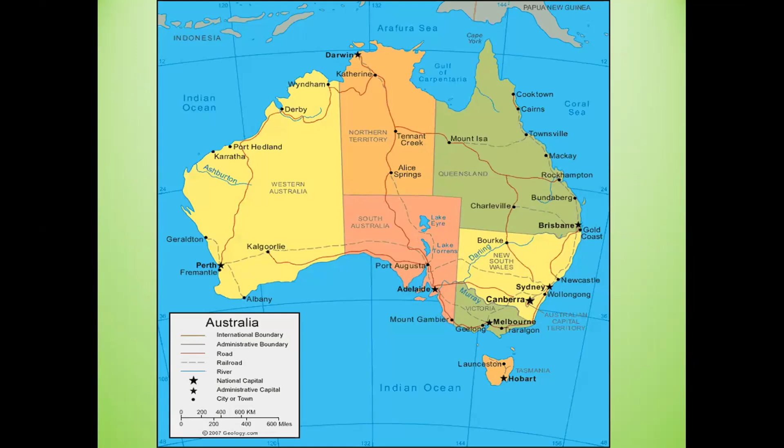While we may not be the largest state in Australia, we are quite heavily populated, and Transport for New South Wales is responsible for maintaining and operating approximately 18,000 kilometres of the road network. And of course, we have bats that occur in those networks.

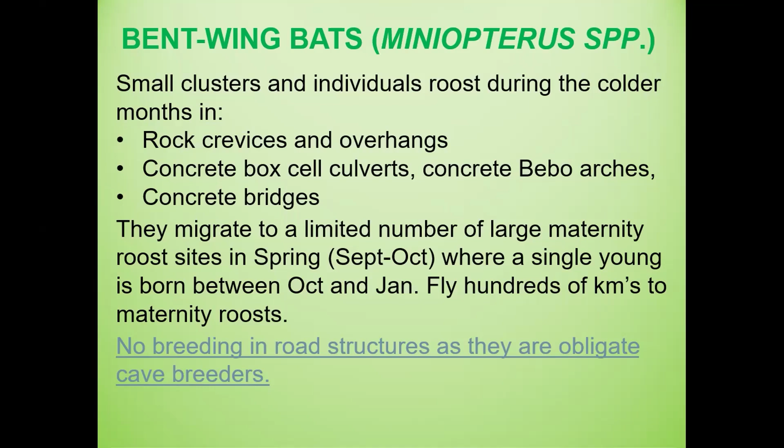So we have bent-wing bats. These are smaller guys, they're obligate cave breeders, so they don't actually breed in any of our structures, but they'll roost colonially in the structures and then fly hundreds of kilometres away to birth simultaneously in limestone caves. So while they do occur, they just don't breed, they just roost over winter.

So we only have one species of Myotis. I know North America has about 18, I think. And these guys will be the focus of today's presentation because replacing long-term breeding habitat is more difficult than replacing temporary roosting habitat.

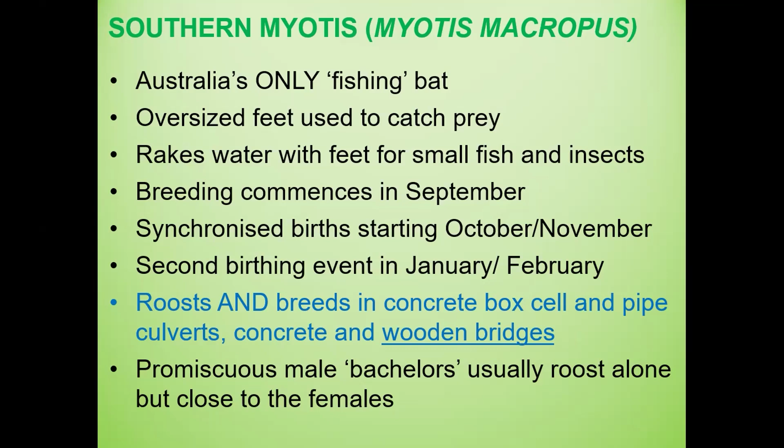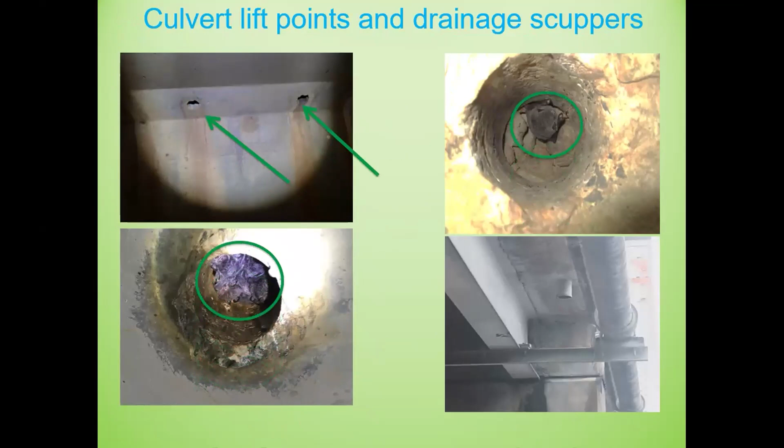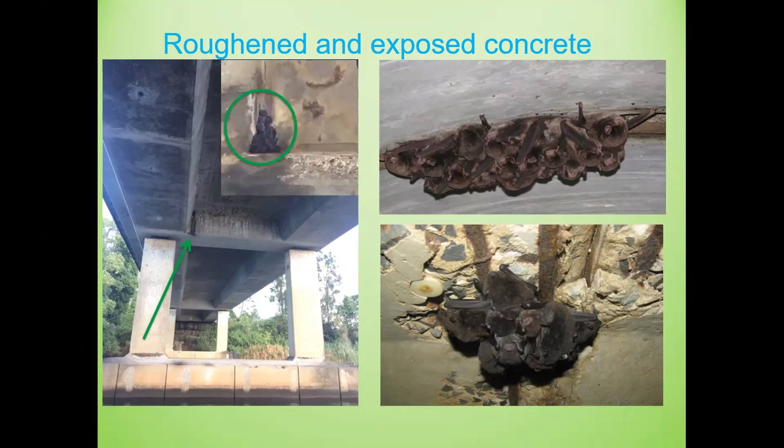So what are the habitat types? I think we're all pretty across this, but culvert lift points or lift holes, drainage scuppers when they're dry, but also when they're wet, expansion gaps within concrete plank bridges, roughened and exposed sections. You can see up here the staining in the bottom, but when you zoom in, we have a cluster of Myotis up there.

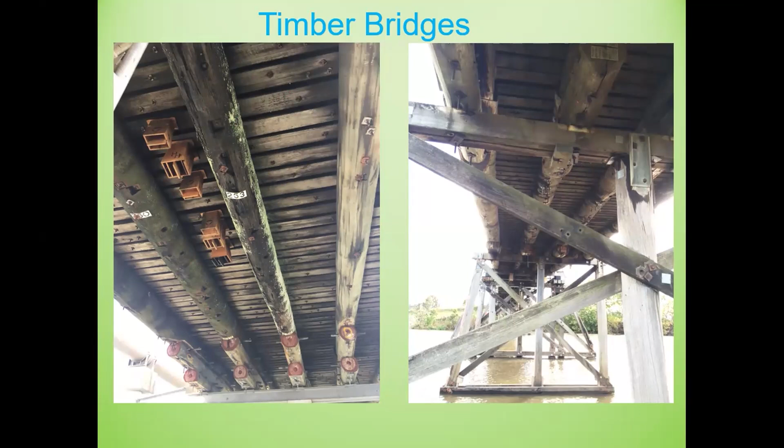Timber bridges, boy, do they love timber bridges. 99% of our timber bridges have southern Myotis occurring in them, and they breed, usually in the transverse decking, cross girders, corbels, and stringers.

The underside of parapets, now this is a good one. So if you don't know what a parapet is, that's that little concrete situation that people put on the side of bridges to make them look pretty. And so then if any fairy martins or wasps want to create nests, they can just blast them off so the bridge looks clean.

Hang on, there's a notification, sorry.

So the underside of the parapets actually provide roosting habitat for large-footed myotis, and they breed there as well, and roosting habitat for the miniopterus or the bent wings. The funny thing is they won't actually move into the parapet underneath here until that's roughened, so when the paper wasp or other wasps come in and start to use their nest, the bats can grab on with their claws.

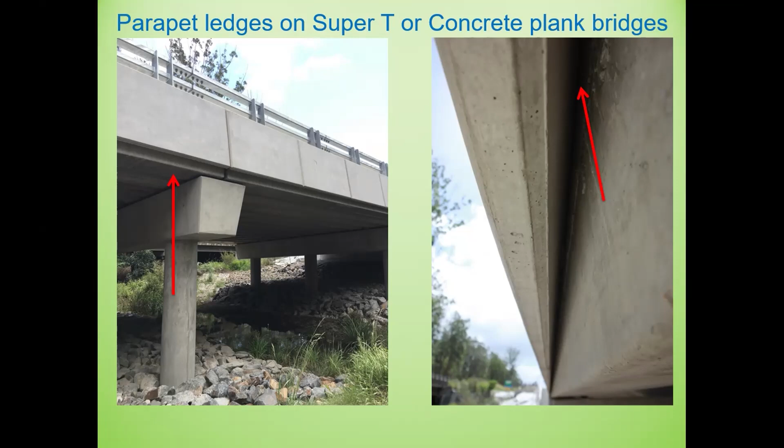So what are the impacts of roads and road projects and maintenance on threatened microbat populations? Well, obviously local extinctions of species such as myotis that have specific requirements, particularly for breeding.

Mortality during bridge cleaning is one thing I came across at ICOET in 2013, my first ICOET. I was gobsmacked that some DOTs were just gurneying all the fairy martin nests off without any environmental assessment, and you'd see hundreds of brown myotis dead on the ground. I'm really happy to see that Texas DOT in particular has come a long way since 2013. I really commend the DOTs for getting on board and coming up to speed over the last 13 years.

Culvert maintenance is a big one, but the real key for us in Australia is bridge removal. If you remove a bridge, you remove 100% of the breeding habitat for the southern myotis, which can also be a cumulative impact if you're looking at removal of bridges across the whole region.

So how does the State Transport Agency manage microbats in their assets? Well, prior to some species being listed under state legislation in 1995, they did absolutely nothing. But they got a little bit better.

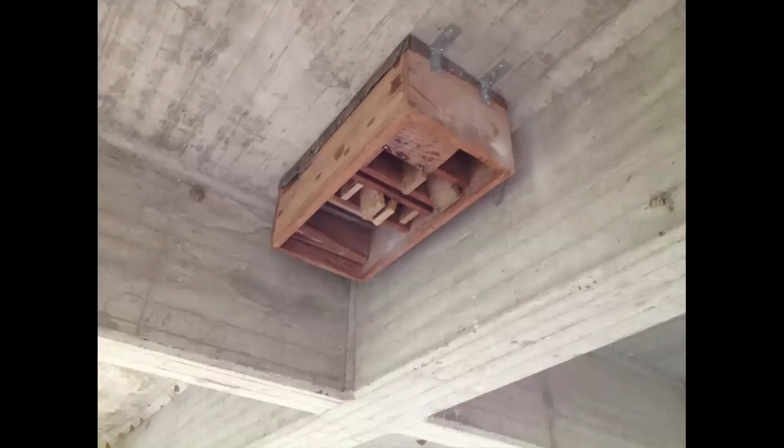There's a choose-your-own-adventure box. We've got cyclase boxes, which are recycled plastic, and wood marine ply - no uptake by myotis. This is what happens in a heat wave event.

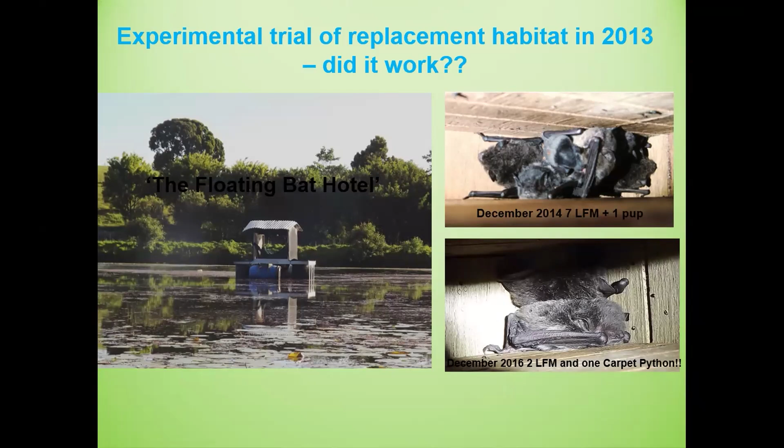We've got experimental trials with floating bat hotels. Yes, it sort of worked, but a python ate the bats. Bat caves did not work - they were nowhere near the water, and myotis need to be within 100 to 200 metres of water.

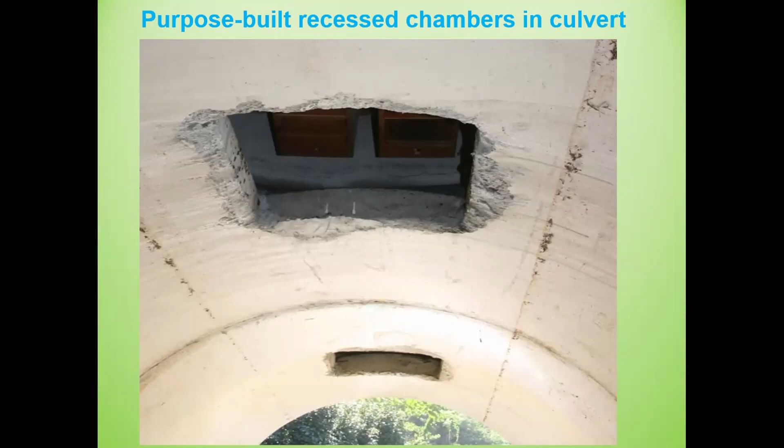Then we started to look at something similar to what Texas DOT was doing, putting purpose-built recess chambers into the culvert. That's a close-up of what they look like. We also included roughened culverts for the bentwing species that like that.

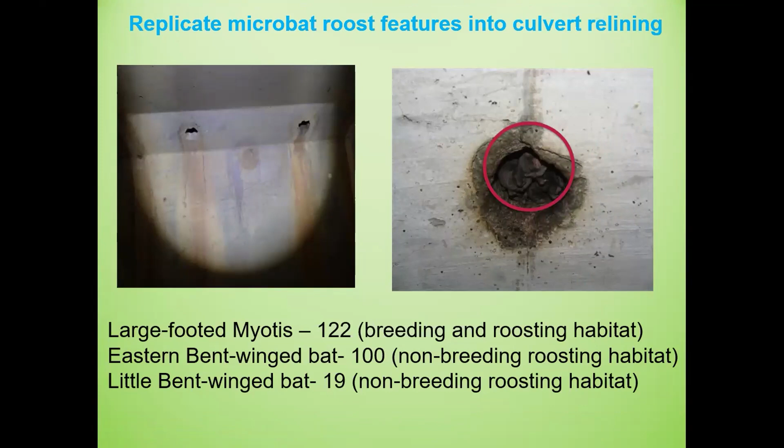They were successful, and then we started to replicate microbat roost features into the culvert relinings themselves. These are the crude drawings we start with - that's pretty much the process of creating permanent cave-dwelling microbat roost habitat in a new culvert.

Then we went to engineering long-term habitat into a new bridge at Sportsman's Creek, near Grafton. This was a long-term situation - it was a significant impact. We had 300 myotis breeding on the bridge. It was a 4 or 5 year project.

We put breeding roost habitat all across the decking, and then we left the super T joins unsealed and roughened, and we had other habitat as well. It worked, monitoring results were great, everything was awesome.

Then we have emerging issues. Timber truss bridges. We've got 48 timber truss bridges under the management of Transport, and they sought to retain 26 and remove the others. We also had 2 programs called Fixing Country Bridges and Bridges for the Bush. The Fixing Country Bridges program was a deal to give out $500 million to New South Wales councils to replace timber bridges with brand new concrete bridges.

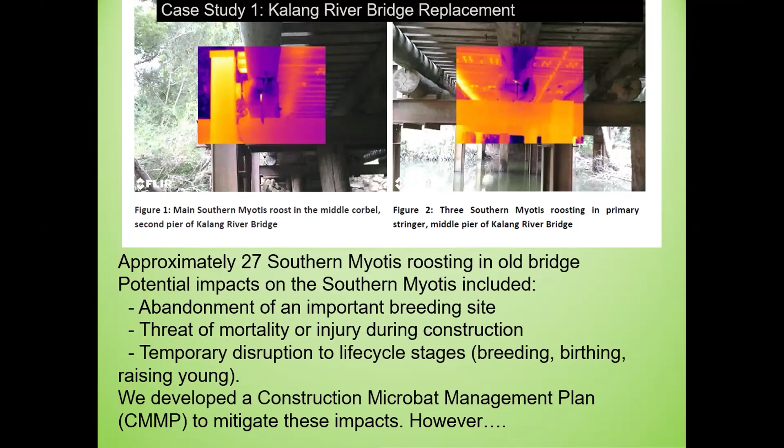However, the council contractors neglected to mention one major factor in their construction methodology. And that was dumping of 5 tonnes of quarry stone to stabilise the riverbank prior to implementing the Construction Microbat Management Plan, and during birthing season.

So that was all here. The main breeding, the maternal colonies here. Those noise blankets weren't up. Those noise blankets came later. So basically, the bats flew out. During the day, they were taken off by kookaburras, currawongs, and butcherbirds.

So while that wasn't the best outcome, working with council, they decided to design permanent precast concrete bat caves or slots to bolt into the new deck, which was great. They were designed by the council engineers and have been installed on 5 other bridges in the council area.

The new Kalang River Bridge, you can see it's pretty close to the old bridge. This is 5 metres away, that new concrete bridge, and the bat boxes are somewhere in here. To date, it's not known if the bats have moved back into the bridge, which is the new habitat, as there was no requirement to monitor. It is also not known if the bridge is going to be retained or for how long.

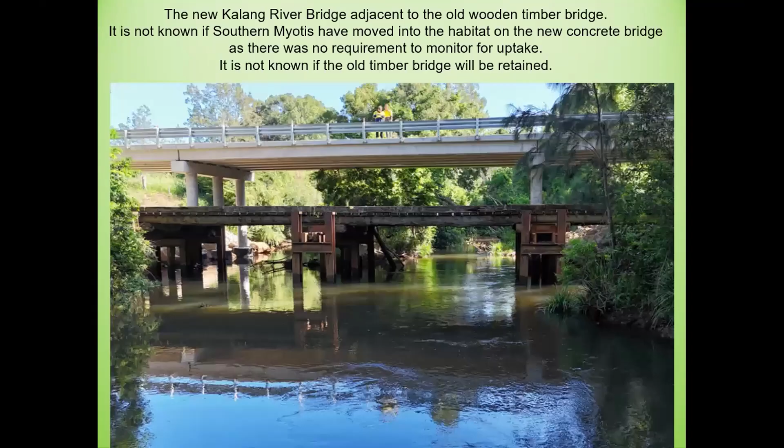Yes, we've actually done that. So in the back of the microbat management guidelines there's some case studies - I can find it. Put there, so if you scan that QR code, towards the back of it there's some case studies, and we have actually put bat boxes up onto a bridge, and we've actually moved them.

We just sort of wrap calico cloth inside it and around it, and we've actually moved the boxes during pup season across to another bridge, pretty close. It was something I would never recommend - nothing went wrong, but I try to avoid doing anything during pup season. Unfortunately for us, that means works can only take place between April and October, so they only have a short window.